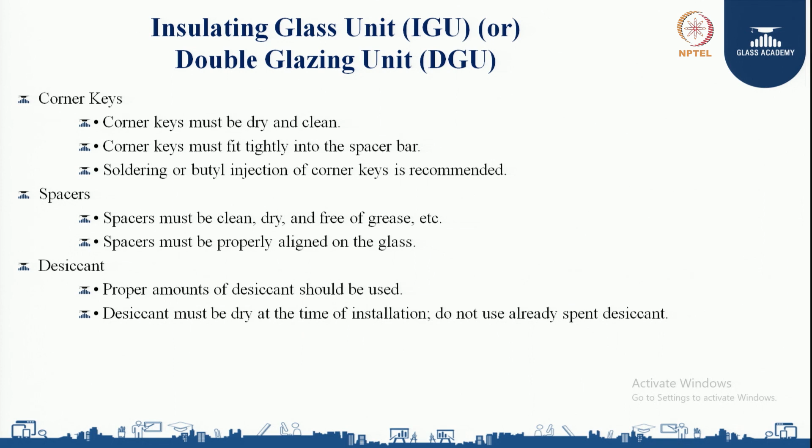Spacer. The spacers must be clean, dry and free from grease. Spacer must be properly aligned on the glass. Desiccant. Proper amounts of desiccant should be used inside the spacer. Desiccant must be dry at the time of installation. Do not use already spent desiccant.

Next, glass. Glass surface must be properly cleaned, free from fingerprints. Proper maintenance of glass cleaning equipment and solution is essential. Glass lites should have no edge defects or inconsistencies. Glass lites must be properly aligned with the spacer.

Now let us understand PIB, polyisobutylene primary seal. Primary seal must be applied in a continuous uninterrupted bead free of voids or skips. No excess PIB should protrude into the secondary seal cavity. Primary seal must be uniformly and sufficiently pressed to give an even thickness and good adhesion to the glass and the spacer surfaces.

Silicone, the secondary seal. Multi-component sealants must be fully mixed and used at the proper mixing ratio. Sealant must be applied in a continuous uninterrupted bead free of skips or voids. Sealant must be tooled into position immediately.

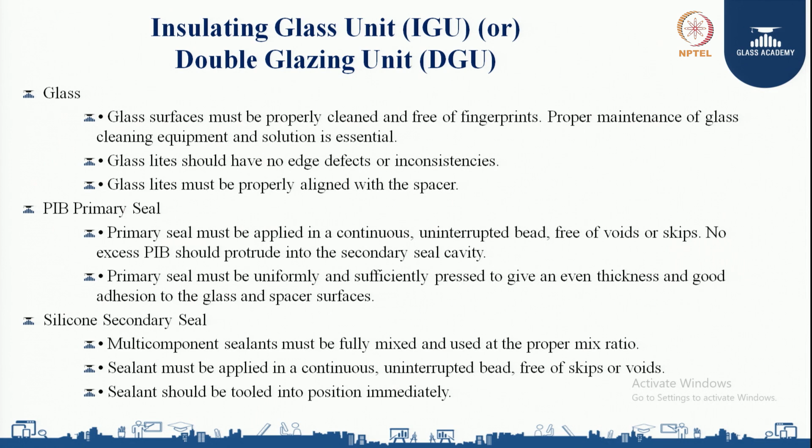Now we will see what we mean by bite. Bite is nothing but the area that has to be edge removed, or the depth of the silicone. The bite will give you structural strength: strength with respect to wind pressure, strength with respect to thermal deflection, strength with respect to dead load or self weight of the glass. So basically the silicone will give structural strength to the DGU product.

Now this is how we are going to calculate the bite. Using the appropriate mathematical derivation, the following calculations can be used to determine the structural sealant bite, which holds the IG unit to the curtain wall mullion. Structural sealant bite, in inches, is equal to half of the smallest leg of the largest lite into wind load divided by sealant design strength.

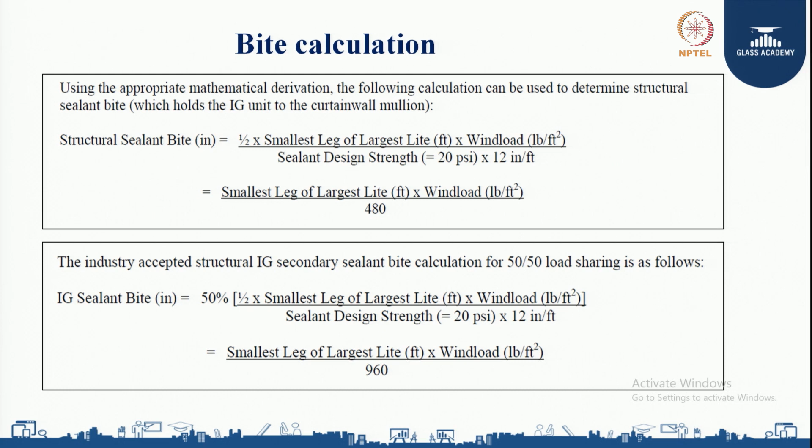When it comes to IGU sealant bite, it is equal to 50% of half of the smallest leg of the largest lite into wind load divided by sealant design strength. You can see here, for the IGU bite calculation with 50 by 50 load sharing, this is the formula we are going to use to calculate the bite. Now we will understand each test we do in DGU glass one by one.

Butterfly test. The secondary sealant is the sealant we use to make the insulating glass unit. It is a two-part component, that is, a mixture of base and hardener. So we need proper mixing of the base and hardener, which you ensure through the butterfly test. The purpose of the butterfly test is to verify the homogeneity in the mixing of the two parts of the sealant.

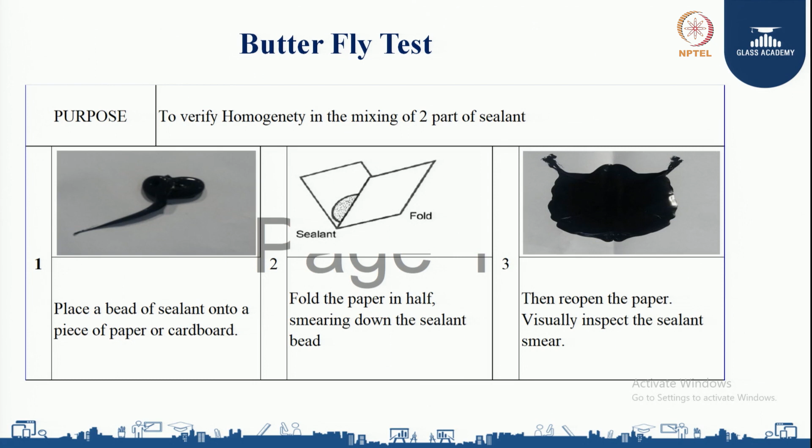Place a bead of sealant onto a piece of paper or cardboard, then fold the paper in half, smearing down the sealant bead, reopen the paper and visually inspect the sealant smear. When a pump is first started up, the smear will appear predominantly white. This is because the equipment lines should have been base purged at the previous shutdown. Continue to make sealant smears and inspect for white streaks.

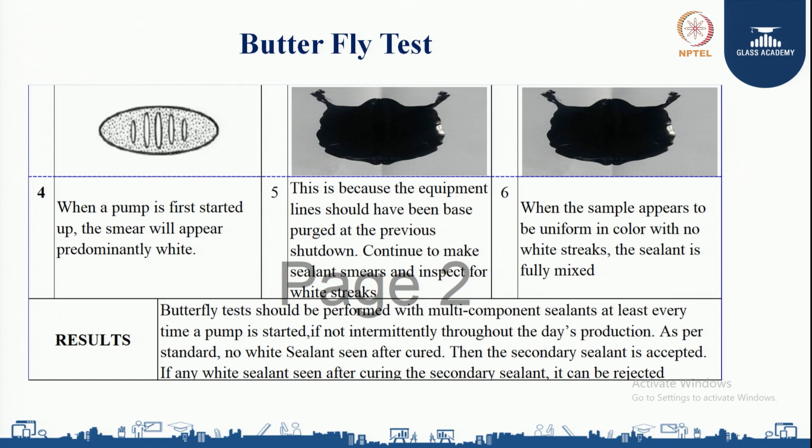When the sample appears to be uniform in color with no white streaks, the sealant is fully mixed. The butterfly test should be performed with multi-component sealants at least every time a pump is started, if not intermittently throughout the day's production. As per the standard, if no white sealant is seen after curing, the secondary sealant is accepted. If any white sealant is seen after curing the secondary sealant, it is rejected.

Next is the desiccant test or molecular sieve test. The purpose of this test is to establish and maintain a documented lab procedure for verifying the effectiveness of the desiccants. The purpose of desiccant is to absorb the moisture inside the DGU. In order to check whether the desiccants are in a position to absorb the moisture or not, first we take 20 ml of water in a beaker. Then the temperature of the water is checked with a thermometer. It is recorded as T1.

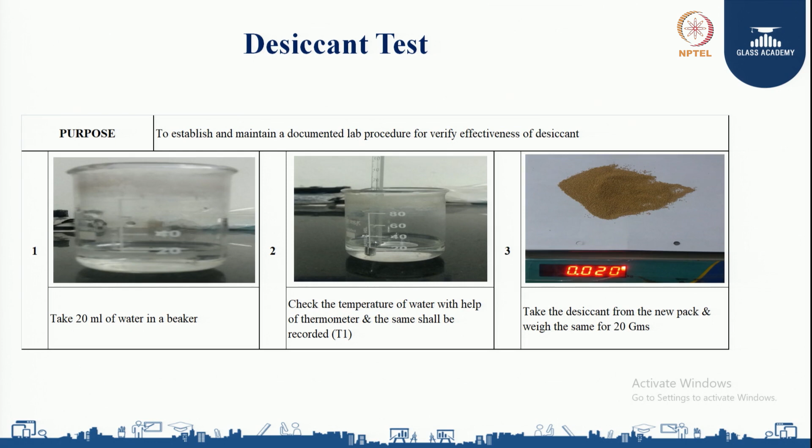Then we need to take desiccants weighing 20 grams. Immediately add these desiccants into the water, insert the thermometer and mix well. The temperature should rise more than 50 degrees centigrade within 2 to 3 seconds. Take the final reading, that is T2. Calculate the temperature difference using the formula below. Delta T is equal to the final temperature after adding the desiccants minus the initial reading, that is the water temperature. That is, delta T equals T2 minus T1.

Start the production based on the result. The standard value for the temperature difference is 32 degrees centigrade minimum. Compare the measured value with the standard value. For example, if my room temperature is 25 degrees centigrade and my desiccant temperature comes to 75, 75 minus 25 gives me 50 degrees centigrade, that is delta T, and the minimum required is 32 degrees centigrade. If the measured value is greater than or equal to the standard value, the desiccants shall be accepted and are in a position to absorb the moisture. When the measured value is less than the standard value, the desiccant shall be rejected.

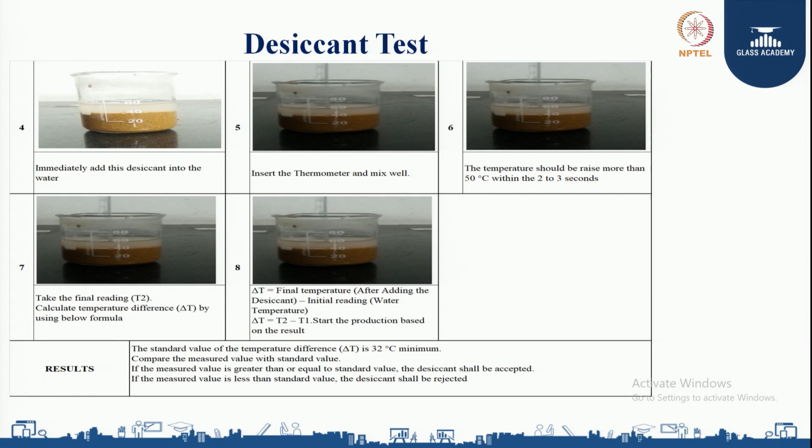Next is the shore hardness test. Through the shore hardness test, we are ensuring the hardness of the secondary sealant. The purpose of this test is to check the hardness of the secondary sealant. We pour the 2-part sealant into a 100 mm by 100 mm square plate to make a 10 mm thick layer of sealant. Allow the square plate 24 hours of curing. Keep the shore A instrument on the cured sealant and press. Note the reading from the shore A instrument.

As per the standard, the acceptable value is 30 to 50 shore A for silicone sealant. The measured value is compared with the standard value. If the measured value is within the standard level, it can be accepted. Otherwise, the sealant requires more curing.

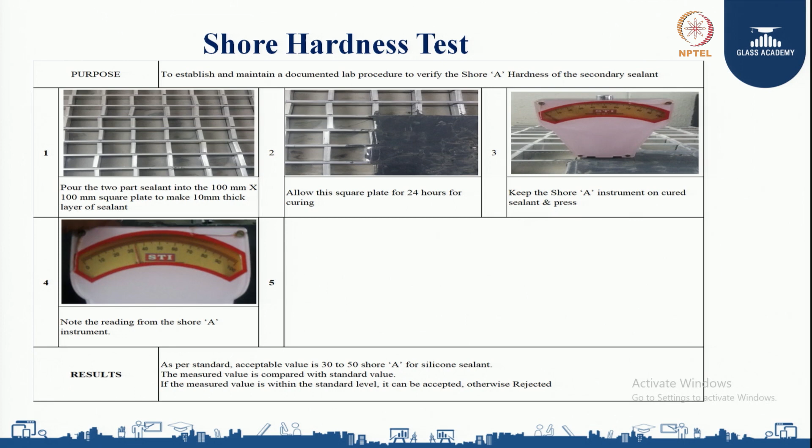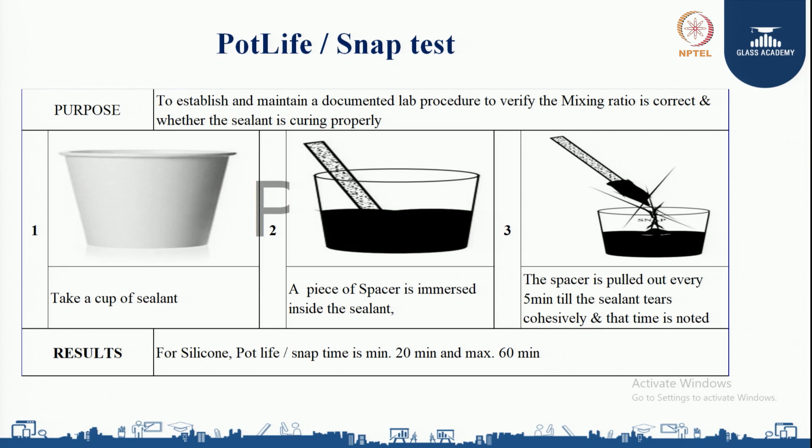Next test is the pot life or snap test. It is performed to verify the mixing ratio is correct and whether the sealant is curing properly. First we need to take a cup of sealant. Then a piece of spacer is immersed inside the sealant. The spacer is pulled out every 5 minutes till the sealant tears cohesively and the time is noted. For silicone, pot life or snap time is minimum 20 minutes and maximum 60 minutes. So through the pot life or snap test, we are ensuring the curing time.

Next one is the parallelism test. The parallelism test is to check the overall thickness of the DGU. As the DGU is a combination of two glasses with the aluminum spacer, we need to ensure the overall thickness of the DGU, and that we ensure through the parallelism test. First we take a finished DGU product and place it vertically. Then using the digital vernier caliper, we measure the thickness at the center of the 4 edges. As we can see in the figure, A, B, C, D, E, F, we need to take the average thickness.

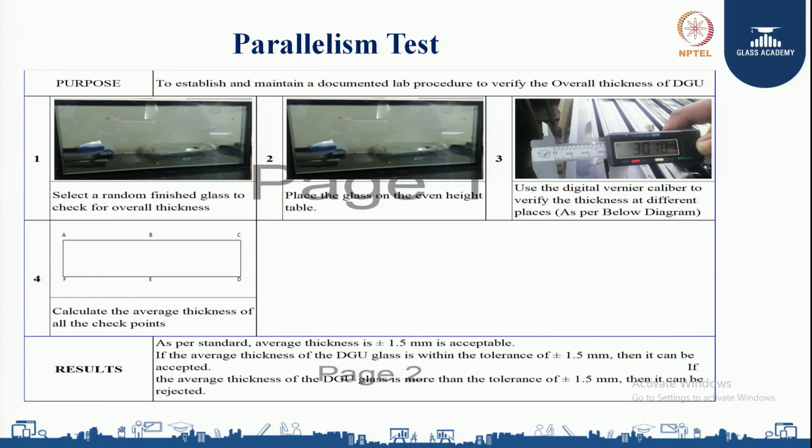As per the standard, the allowed average thickness tolerance is plus or minus 1.5 mm. If the average thickness of the DGU glass is within the tolerance of plus or minus 1.5 mm, then it is accepted. If it is more than the tolerance, then it is rejected. Next one is the dewdrop test, which we do to check the condensation inside the DGU.

So we'll be taking a DGU sample and keeping it inside the freezer at minus 20 degrees centigrade for 2 hours. Allow the freezer to freeze at minus 20 degrees centigrade, and after 2 hours take out the DGU sample from the freezer and check for condensation. Condensation can happen either on the outside surface, inside surface, or in between the DGU. Outside or inside can be wiped out, whereas in between the DGU is not okay.

In that case, we need to check the primary sealant continuity, secondary sealant curing and hardness, and whether the desiccant is in a position to absorb the moisture or not. So the result should be no condensation inside the DGU. Failure results from bad quality of primary sealant, secondary sealant and desiccant.

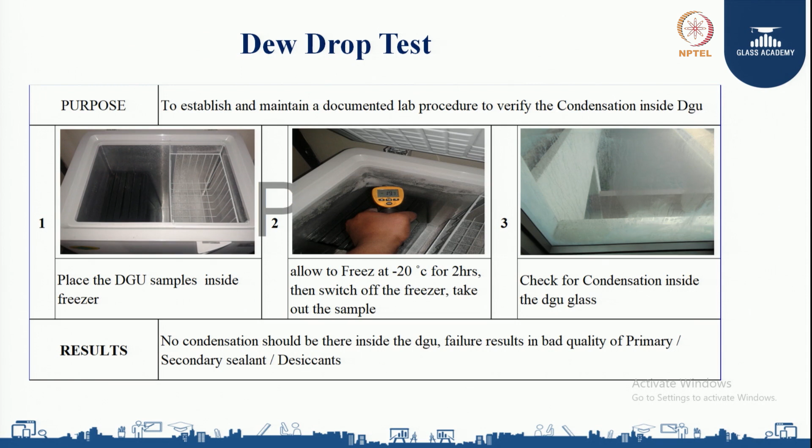You can see in figure 1, the DGU glass is placed inside the freezer, then it is frozen at minus 20 degrees centigrade for 2 hours, then it is taken out to inspect whether it is having any condensation inside the DGU. Next one is the silicone peel adhesion test.

The purpose of this silicone peel adhesion test is to ensure the bonding or adhesion between the glass, silicone and the spacer. The sealant gives acceptable adhesion to the glass and the spacer surfaces. The procedure is: apply a bead of silicone sealant to the clean spacer surface, allow the sealant to cure for a specified time. After the specified time period, pull out the sealant and visually inspect for the mode of sealant failure.

You can see in the figure, when I am trying to pull back at 180 degrees, the glass sample from the spacer, it is an adhesive failure. The same thing when I am trying to pull out in figure B, there is a cohesive failure where the sealant is tearing within itself. So an adhesive failure is a bad sign, whereas a cohesive failure is recommended.

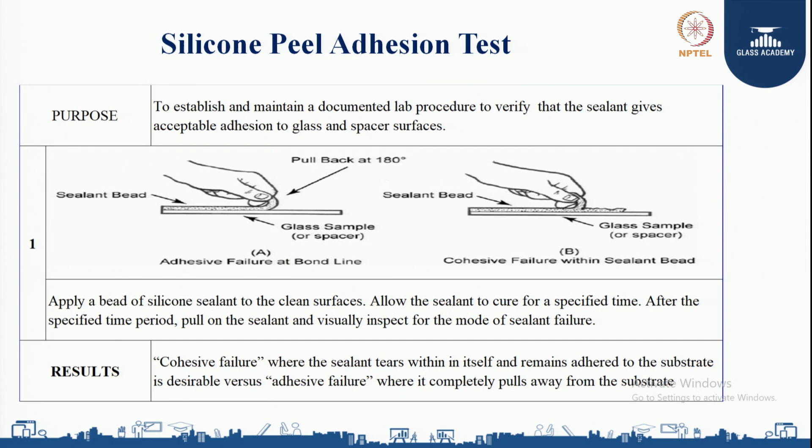So we can see in the result also, cohesive failure, where the sealant tears within itself and remains adhered to the substrate, is desirable, versus adhesive failure, where it completely pulls away from the substrate.

Next test is the glass thickness test and air gap test. So as it is a DGU glass, it is a combination of minimum 2 glasses with the air gap. With the help of an air gap tester, we can say what the thicknesses of individual panes are, as well as the air gap in between the DGU. So with the help of the Merlin Lazer air gap tester, we just need to place the equipment on the glass surface and identify.

How we are going to identify: I will be placing this equipment on the DGU glass. Once I press the button, I will be getting a minimum of 4 lines, which indicate surface 1, surface 2, surface 3, surface 4. So when I am measuring from right to left, first line to the second line indicates the glass thickness. Second line to third line indicates the air gap in the DGU, and third line to fourth line indicates the second glass thickness. So through this air gap tester, you are able to check glass thickness as well as the air gap inside the DGU.

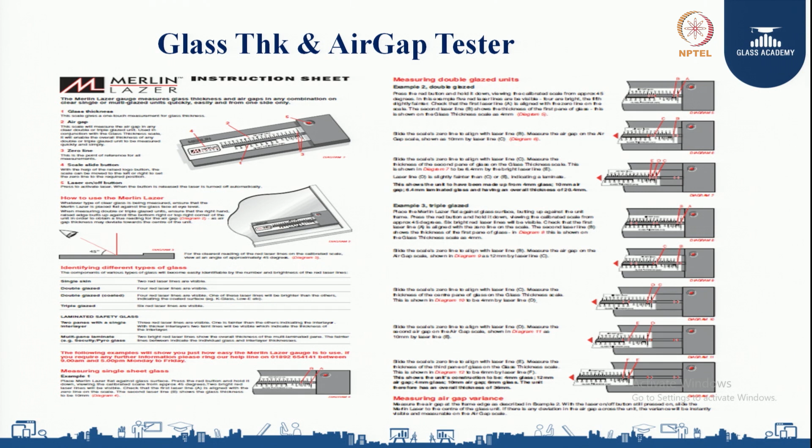Also, this equipment can be used to measure the coating surface, and if any PVB layer is present, that also can be traced through this equipment. So if it is a single glazing unit, you will be getting 2 surfaces, thereby 2 lines. If it is double glazing, you will be getting 4 surfaces, thereby 4 lines. If it is a laminated DGU, you will be getting 6 surfaces, thereby 6 lines. If it is a double lami DGU, you will be getting 8 surfaces with 8 lines. This is how you are going to trace out the glass thickness as well as the air gap inside the DGU. This concludes all the tests that we do for a DGU glass make.